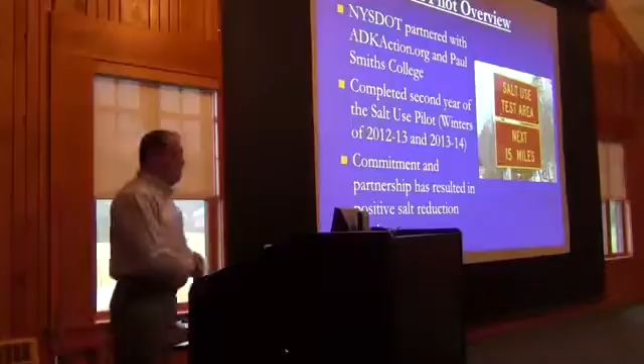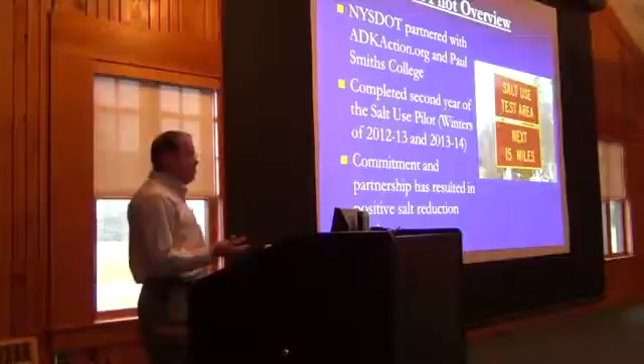The Department of Transportation partnered with ADKAction.org and Paul Smiths College to start this salt use pilot up here in the Adirondacks, to take a look at what our practices are and ways to help reduce the application of salt into the environment. We just completed our 2nd year. It was the winters of 2012-13 and 2013-14.

And this just kind of shows our commitment and partnership with the 2 groups, and to work with them and work with our folks to try to have positive salt reduction results. And this presentation here will show some of those accomplishments over the past couple of winters.

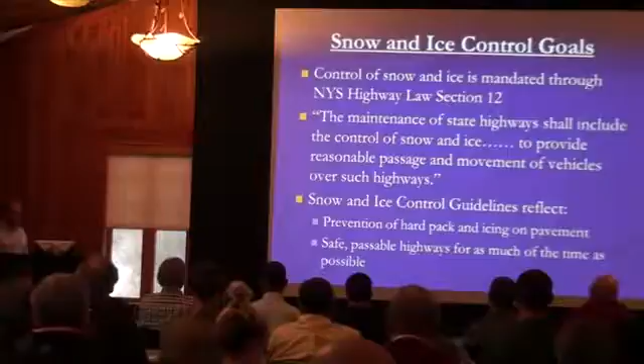Snow and ice control goals that the department has. We're mandated under New York State highway law to provide maintenance of the state highways, including snow and ice control. And it's our mandate to provide reasonable passage and movements of vehicles over the highway system. And our snow and ice guidelines do reflect that, and we do work to prevent the formation of hardpack and icing on pavement, while also maintaining safe and passable highways for as much of the time as we can.

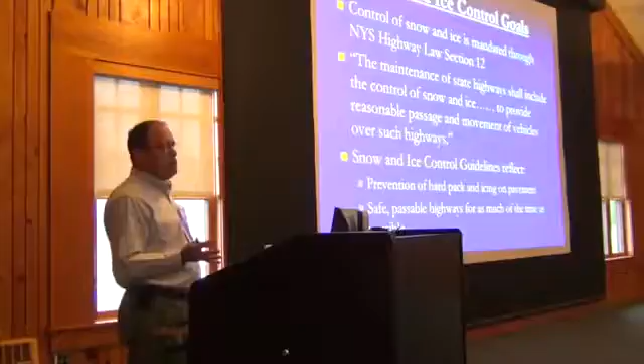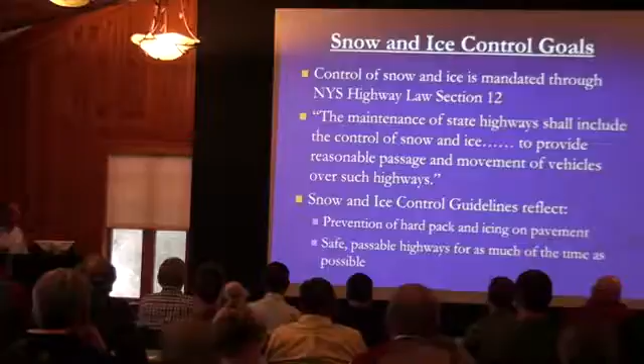There's going to be snow and ice accumulating on the highways, but as long as we're working to prevent that from bonding and to keep the highways relatively safe, we do that as best we can, while also keeping the environment in mind as we're conducting our operations.

In 2012, we modified our snow and ice guidelines in reducing our salt application rates. So statewide, for snow events, we reduced our initial application rates by 10% across the board. Okay, so that was one step we've taken. And we've also expanded the use of pre-storm anti-icing operations using liquids.

We're expanding the use of salt brine in advance of a storm so that we can get the brine and the salt on the road, and then once the storm hits, we can come by with a follow-up application rate of salt instead of starting with our higher initial application rate of salt. So that's another area where we've improved our operations.

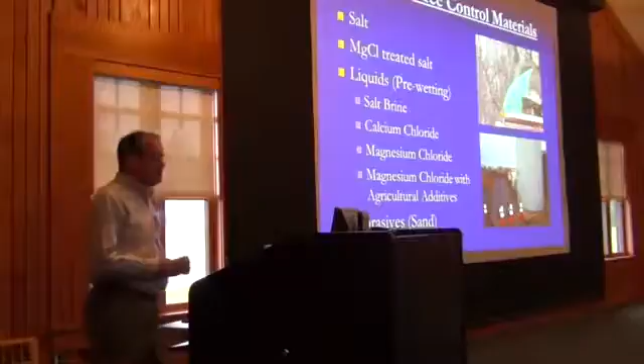Types of materials that we use: primarily we do use salt. It's relatively inexpensive, although the prices did skyrocket this coming year with the OGS contract. We also use salt treated with magnesium chloride. That allows the salt to perform a lot better in colder temperatures. We can use it at reduced application rates. And our DOT facility in Essex County has gone exclusively to treated salt now because of the added benefits that we've seen in its performance.

For liquids, which we use for pre-wetting the salt before it hits the road, is salt brine. Salt brine we also use for direct application on the pavements. But for pre-wetting salt, calcium chloride is used, magnesium chloride is used, and also magnesium chloride with agricultural additives is utilized. And again, that coats the salt, allows it to work quicker and work better at a lower application rate.

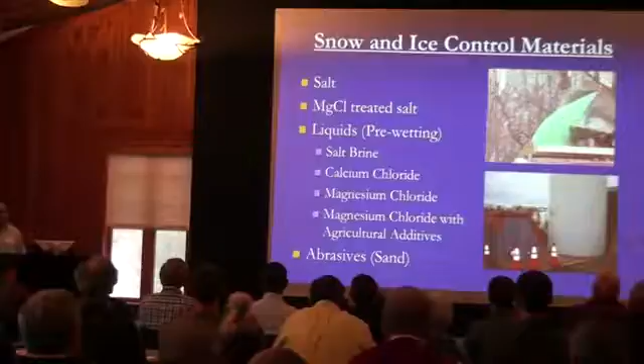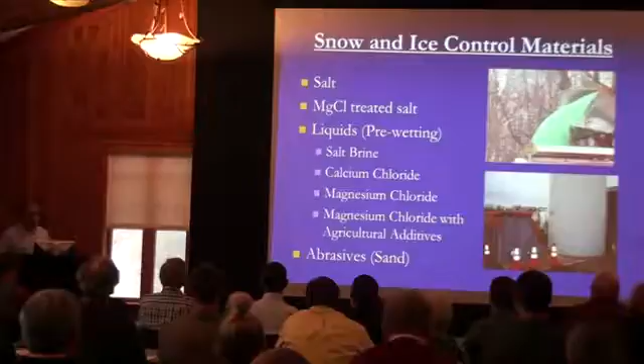Sand is not effective for higher traffic speeds. Heavier applications are needed, and the sand needs to be mixed with salt so that it doesn't freeze up rock hard in the storage facility. So in order for the sand to not freeze up, we have to mix salt in there. So we're still putting down higher application rates of sand with also a higher amount of salt within that sand.

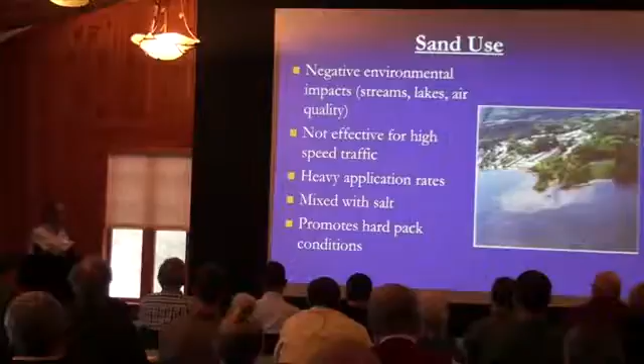Unfortunately, sand does not melt ice, so it does promote hard pack conditions on the road, which require higher amounts of salt to burn that off.

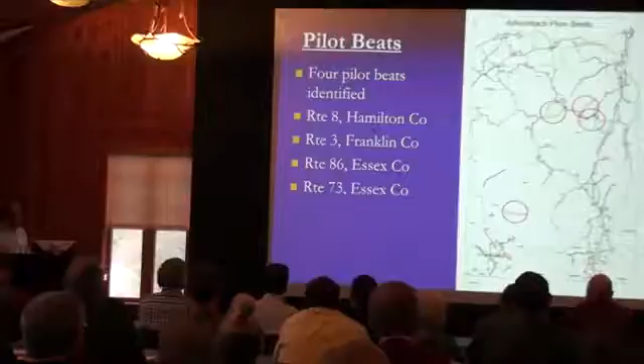The pilot beats: this map shows all the plow beats up in the Adirondack Park. All those different colors are individual snow plow beats. We identified 4 pilot beats for this study. One is down Route 8 in Hamilton County, Route 3 in Franklin County, Route 86 coming out of Lake Placid, and Route 73 along the Cascade Lakes corridor.

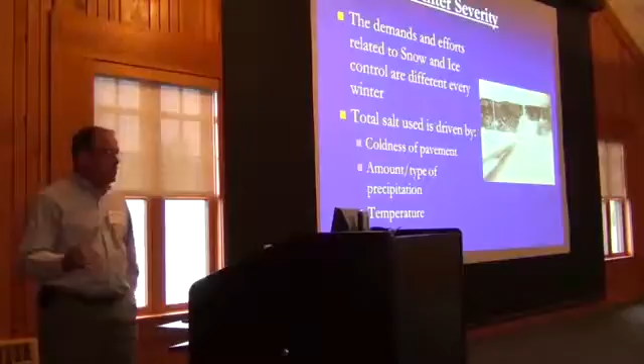All right, so I mentioned earlier some of the challenges that we face in trying to maintain safe highways in the winter and also being good for the environment. But the demands and efforts of snow and ice control are different every winter. You may remember the winter of 2011. That was basically a half winter for us. There was hardly any snow, hardly any winter precipitation. Last winter we got clobbered. It was a very, very bad winter. We're out there quite often treating the highway pavements.

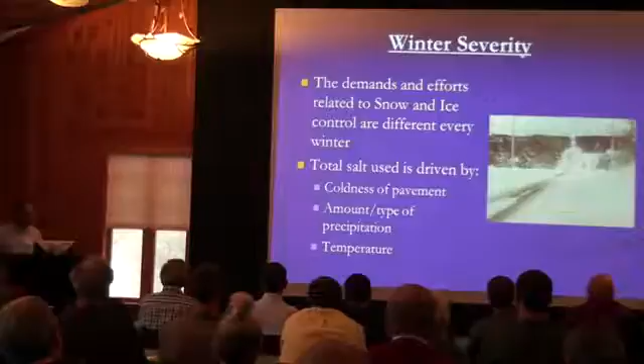So the total use of salt or any other snow and ice control materials is driven by the coldness of the pavement, the amount and type of precipitation, be it light fluffy snow, heavy wet snow, freezing rain, whatever the case may be, and the outdoor temperature.

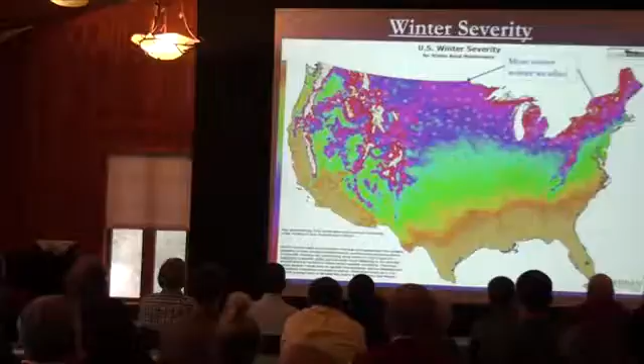This is a winter severity map of the United States, and this was put together through a research group that New York State is a part of called Clear Roads. Clear Roads is a pooled fund with 29 member states, and Dave Weeder here from Colorado DOT is the chairman of that committee right now. As I mentioned, New York State is a member of this.

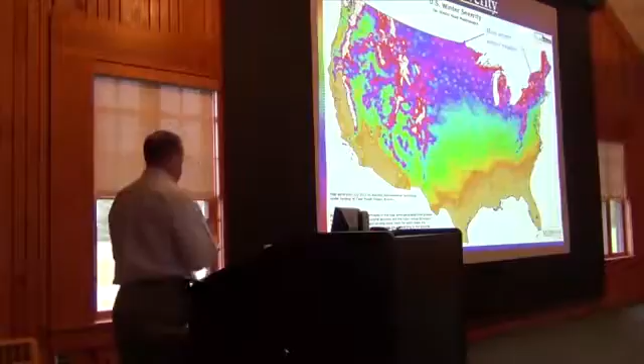What we did is we put together a research study to develop a winter severity map across the United States. Down south you really don't get much. You can see we have no member states down here, so we can't go to warm places for these meetings. But down at the bottom of the scale, where it's white and pink, those are the worst winter severity areas in the country. They take into account the amount of snow, freezing rain, temperature, blowing snow, all sorts of things. This is one map that compiles all that information.

So if you look at the most severe winter weather in the country, you can see out here in Colorado you got some white areas, up in the high peaks of the Rockies. Take a look right there. Right there is Saranac Lake. So Saranac Lake, Hamilton County, up here in the Adirondacks, the reds and the whites and the pinks. New York State has some of the worst weather in terms of winter severity in the country.

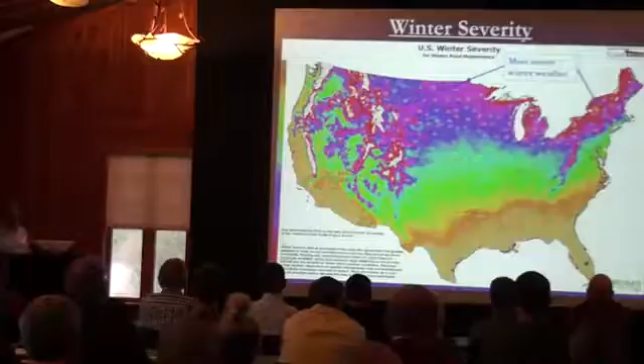Let's talk a little bit about the melting power of salt. Salt is not very effective in cold temperatures. At a temperature of roughly 30 degrees, 1 pound of salt will melt 45 pounds of ice. You drop 5 degrees down to 25 degrees, and 1 pound of salt will only melt 15 pounds of ice. And it gets worse as it gets colder.

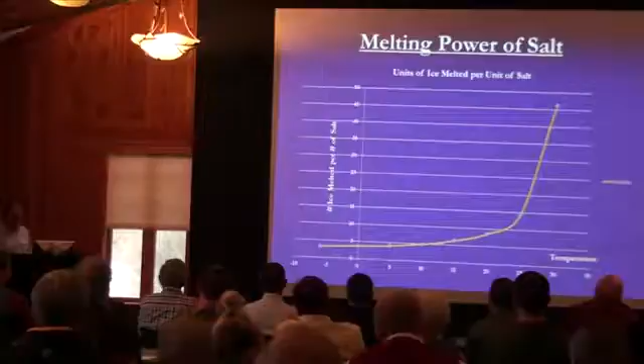So with the colder temperatures that we've been experiencing, although we're working hard to maintain lower application rates and control the salt use going out, with the lower temperatures and higher precipitation, more material is needed. So what we did is to kind of equalize a normal winter to what we experienced over the last several years.

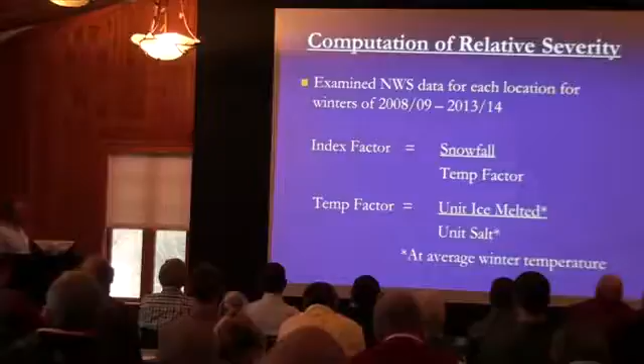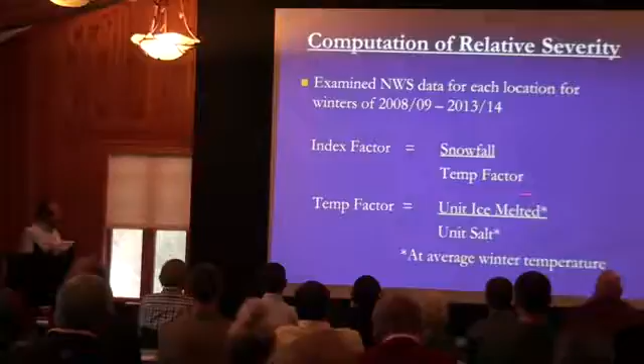We developed a relative severity equation here. So from 2008 through the 2013-14 season, we developed an index factor which looked at the National Weather Service snowfall data, and we divided that by a temperature factor. The temperature factor is the amount of ice melted over the amount of salt needed to melt that ice at average winter temperatures.

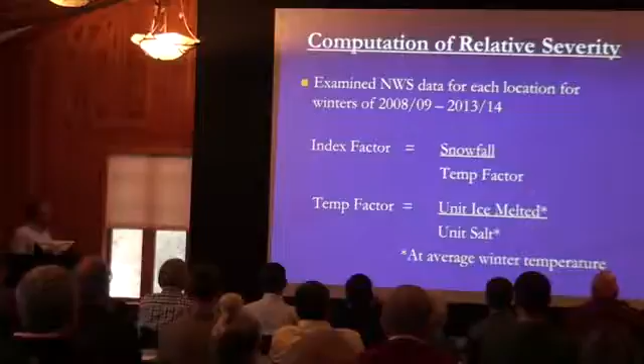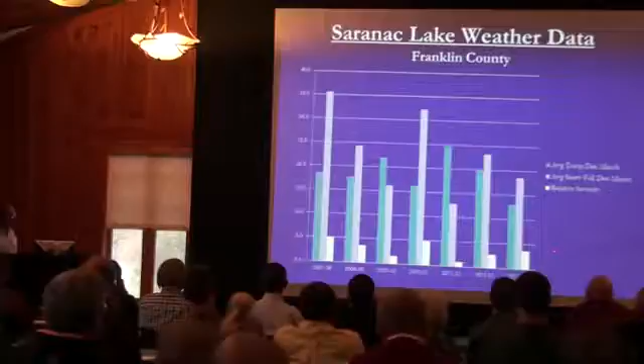But basically, using that equation with winter severity, you can see at least the last 3 seasons, when you equalize it out, the severity of the winters has been increasing. Okay? You can see that moving up. Now, my next batch of slides, I'm not going to go through all of them in the interest of time. I'm just going to go through one of them here, and I'll flip through the rest, but you can look at them on the

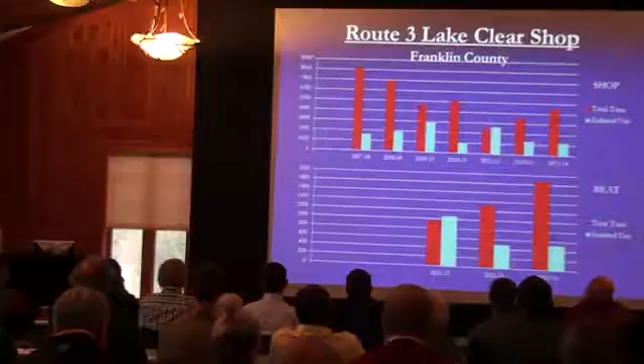So now if you look at the actual index use with the severity, that's the light blue, you can see that when you equalize it, it's actually been coming down. So the amount of salt we've been applying relative to the winter has been coming down over the last several years during the pilot. So we think that's good. It shows how closely our supervisors are monitoring the salt applications out on the highway system, and with the challenges of the colder winter, we're just trying the best we can to control the salt use, so we only put out as much as needed.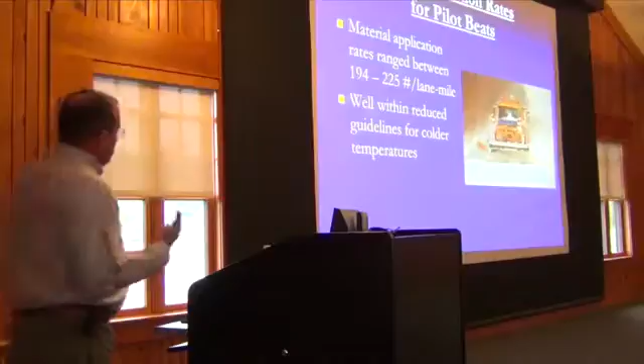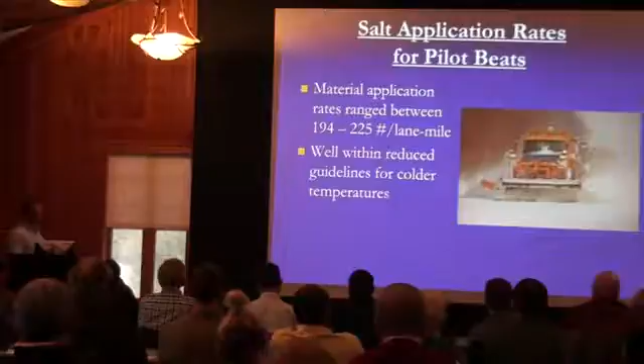So anyway, one of the successes here is the material application rates have ranged between 194 to 225 pounds per lane mile. For the temperatures we've been experiencing, that's well within and actually a little lower than the application rates in our snow and ice guidelines. For the lower temperatures, around the 20-degree area, our guidelines actually say 250 pounds per lane mile is what we should be using. But based on the data we've collected, we've come way down below that, and we're still maintaining the road safely.

Some of the tactics that we're using for the Adirondack pilot, and actually statewide in many cases, is the use of underbelly scrapers on our plow trucks. Our plow trucks usually have a front plow and a right wing. If you're out on the interstate, you might see two wings on the plow. But we also have these underbelly scrapers. It's kind of like a double-edged razor when you're shaving. The first plow takes off the majority of the material, and this underbelly plow will be like that second blade coming through to get anything that the first plow blade has missed.

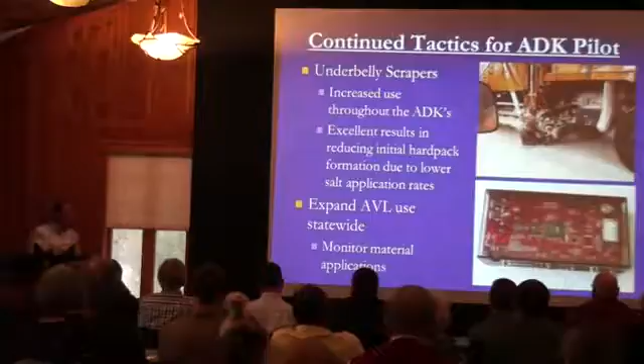In Franklin County, there are 20 plow trucks in that county, and we have 5 of those trucks with an underbelly scraper. And as we replace trucks, get new trucks into the fleet, we're getting more and more with the underbelly scrapers on there.

The underbelly scrapers, we have a lot of good experience with them, and when we lower those application rates as low as we can go, we're probably right down at the limit as to where the salt remains effective to when it becomes very ineffective. And we've been noticing with the lower application rates that hard pack had been starting to form in some areas, and those underbelly scrapers take it right up.

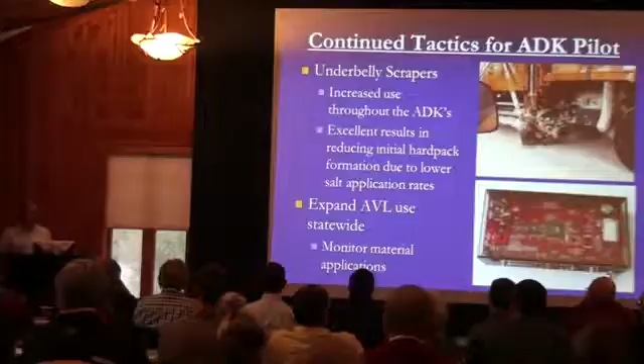So instead of coming down and putting a bunch more salt on there to try to melt it away or burn it off, those underbelly scrapers are actually doing a good job hitting that hard pack right as it's starting to form to keep it off the road.

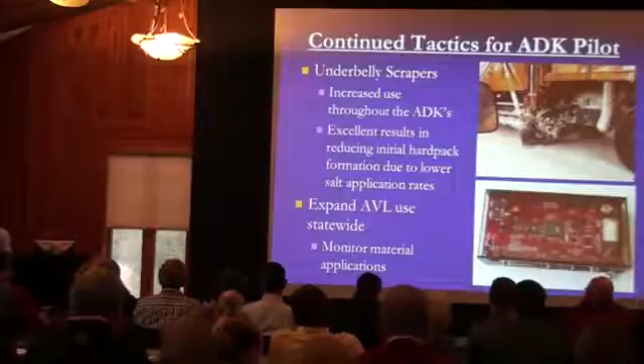We're going to expand the use of AVL, which is automatic vehicle location systems, across the state. We've been using them up here in the Adirondacks. The cell coverage, which is what we need to transmit the data, is kind of spotty, so we're not getting the full benefit of the AVL use up here. But statewide, we're expanding the use of AVL.

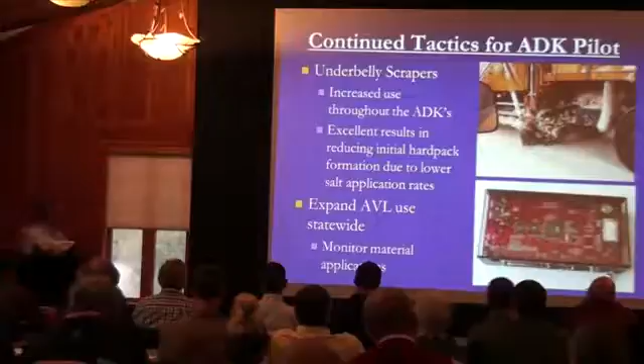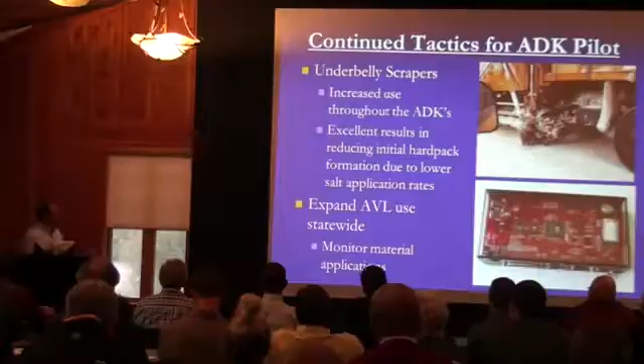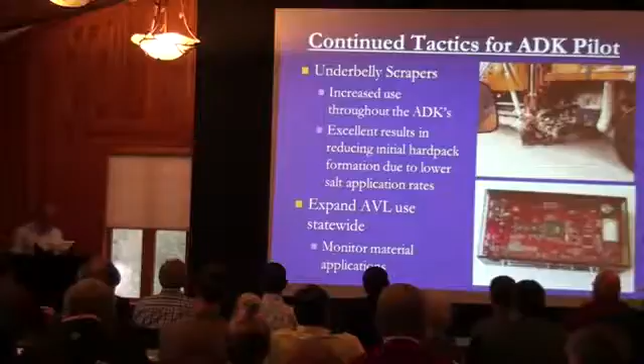And what that can do is provide data as to how much material we're putting out, where the trucks are, how fast they're going, that kind of information that the managers can use to make sure that if someone's putting out a much higher application rate than they're told to or should have, they can follow up with that driver, or maybe there was a situation that needed a higher application rate. So that's just another step to try to monitor our salt use as much as possible.

We're increasing the operation of pre-storm anti-icing. That's where we put the liquids down on the pavement before the storm actually hits. We can't do that for every storm. If it's going to rain ahead of time, that's kind of a waste of putting material out. If it's too cold, you might not be able to put the liquids down.

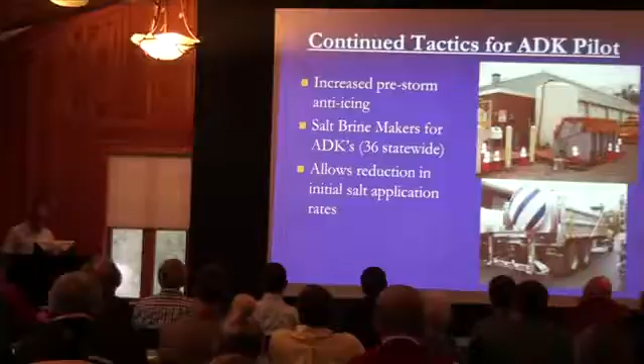One of the projects we worked on recently is purchasing a bunch of brine makers to be used across the state. We purchased, or are purchasing now and having installed, 36 brine makers across the state in addition to the few that we already had. And again, as I mentioned earlier, that allows the reduction in initial application rate of salt when the plow trucks actually come out to attack the storm.

In the Adirondacks, specifically in our Region 1, we have a brine maker going into the Severance shop and one at Ray Brook. And in Region 7, we have one in Plattsburgh, Malone, and Massena. We can't put salt brine makers everywhere because you need a real good water source, and some of our locations are on wells that just don't have the recovery. So we try to use locations that have a municipal water system.

So if we have brine makers in these locations, we can also always install a couple of storage tanks in our remote locations, produce the brine at one of these locations and tank it over and have it available at a location that doesn't have a brine maker.

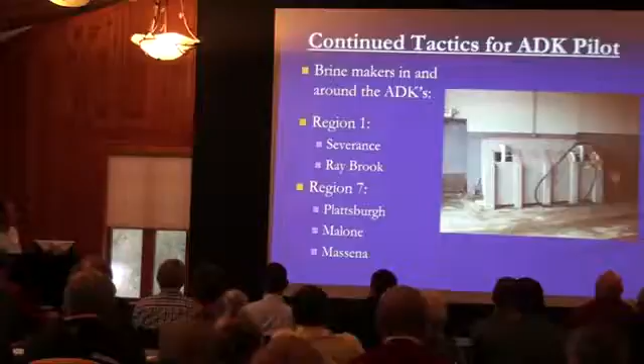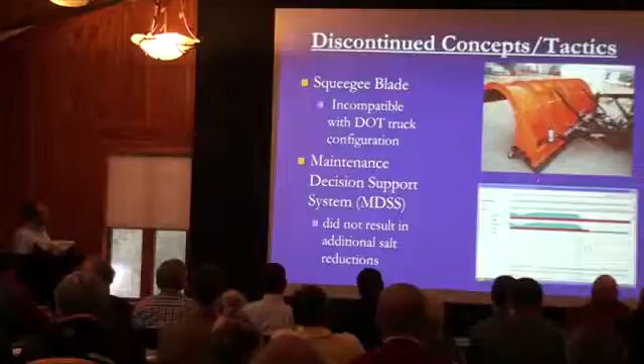Some of the things we tried but are discontinuing as a result of this pilot is the squeegee blade. Squeegee blade is a good idea, kind of like what I described with the underbelly blade. You got the extra blade here. You got the cutting edge right here on the front of the plow. This is a heavy rubber blade that comes down and squeegees off behind that first blade.

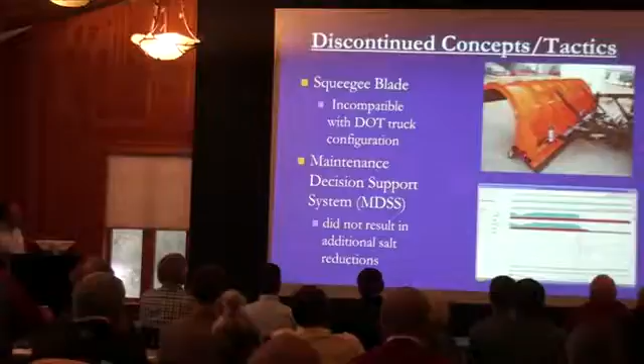Problem we saw with that is it's not compatible with our trucks. When the blade goes back and forth, it hits the framework of our truck and damages this part of the blade. It also didn't perform as well as we thought it would in terms of squeegeeing off behind, so we discontinued that use. That was one of the things we were going to try out here. We tested it out actually in the middle part of the state before we brought it up here, and found it didn't really work all that well.

Another system that we tried is a maintenance decision support system. We tried that at several locations across New York State. And basically what that does is it's supposed to take into account the weather forecasting, the type of material we're using, what our snow and ice guidelines are, information from road weather information system. All that data gets put into the system, and then it basically gives us recommendations.

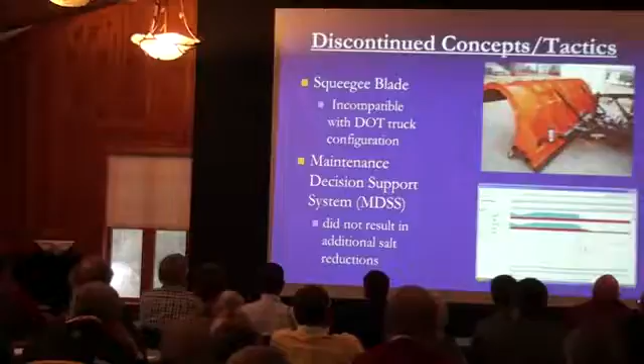It's kind of hard to see, but those three things there are little plow trucks. Okay, so as the storm was coming in, the system will tell us, okay, at a certain time, the plow truck should go out with a certain amount of application of salt or whatever it is, and then 2 hours later do the same thing or at a reduced rate or whatever. So it'll give you those recommendations on when to start, when to stop. Maybe you don't have to apply material, just plow. It's supposed to result in salt reduction.

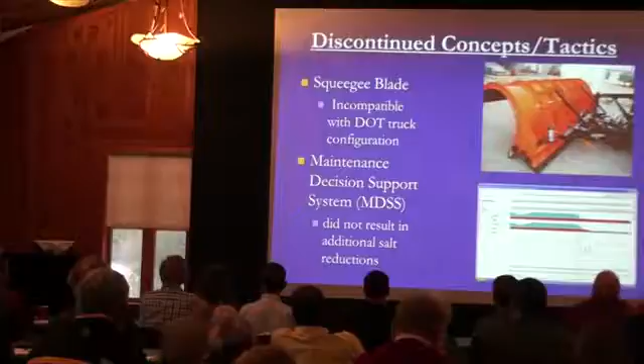And the pilot areas down in the western and the southern part of the state that we tried this, we really didn't see much of a salt savings that the system recommended because our application rates were already low enough that, if that told us to cut it even in half or even more, the salt wouldn't be effective. So that really didn't show us the savings because we're already managing our salt as well as we can. So there's no sense in investing any more into that system.

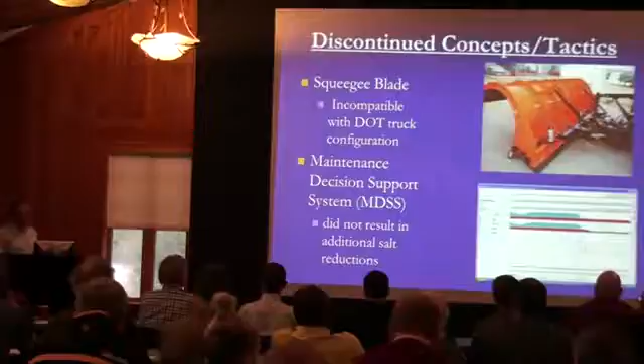And that's one of the key things is, point sources are a problem. We don't know how much that contributes, but if you have an open pile of salt just sitting out in the environment and over the summertime, that's just constantly getting rained on and washing into the environment. So if there's any uncovered salt piles out there in the towns or the counties or whatever, or at like a shopping mall or something, there might be a pile of salt plopped down there for their use. That kind of stuff needs to be covered, and that's where some improvements can be made beyond DOT, but we have everything under cover.

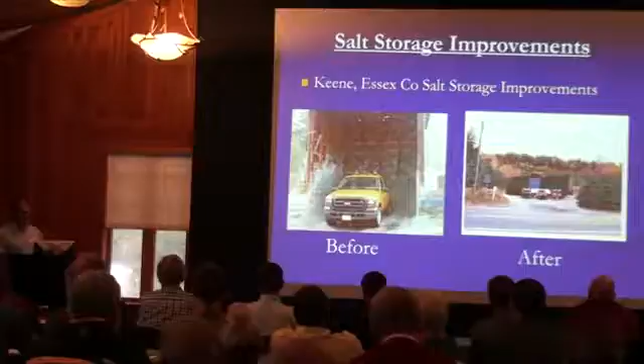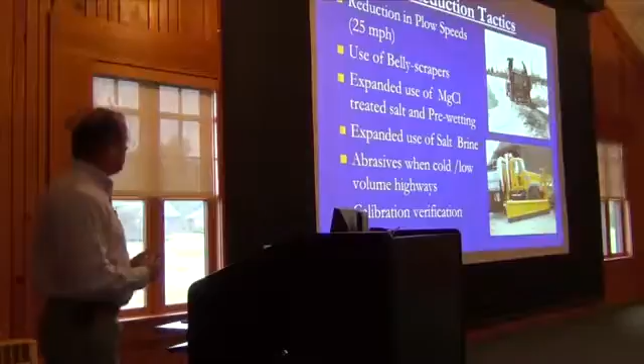So anyway, our salt reduction tactics, to kind of wrap it up here, one of the things we did up here in the Adirondacks specifically is to reduce the speeds of the plow trucks. Normally we go 30 to 35 miles an hour, but we reduce those speeds to 25 miles an hour. And the reason for that is as the salt comes out of the truck, it bounces and scatters. So if we slow down the truck, it reduces the bounce and scatter, and the majority of the salt stays on the road where it belongs, so it can be effective and anti-ice the pavement instead of bouncing off onto the shoulders and getting into the environment without being used.

Again, the use of the belly scrapers. Expand the use of magnesium chloride treated salt. As I mentioned, Essex County is exclusively using the mag chloride treated salt, and also for pre-wetting salt directly off our trucks. You can kind of see here, right here is what we call a saddle tank. It goes along the side of the truck, and in the saddle tank is where we would carry the magnesium chloride liquid. And then out of the back of the truck, when the salt comes out off the spinner, it gets sprayed at that point.

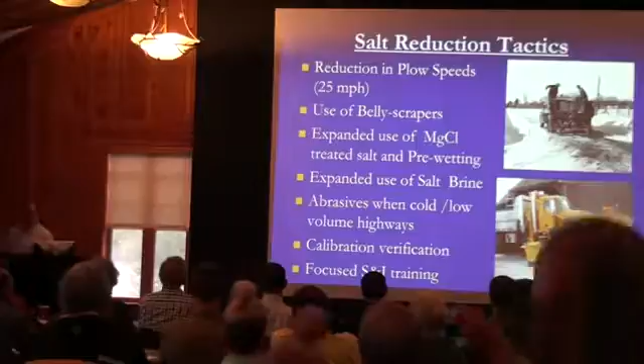We'll continue to use abrasives sparingly. Where the salt is ineffective, we may use sand on a steep hill or intersection to try to keep a little bit of friction there so the cars can stop. Calibration verification every year. Our spreader controllers for the trucks have to be calibrated. We make sure they're calibrated, so when the spreader is saying that we're putting out 115 pounds a lane mile, we're putting out 115 pounds per lane mile. And we'll calibrate them during the season to make sure the trucks are still accurate.

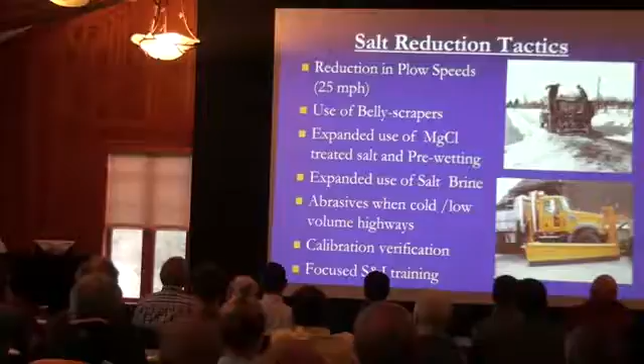And we're doing some focused snow and ice training. We do that statewide anyway, but up here in the Adirondacks, we're working a lot more with the supervisors and the operators to stress the importance of the environmental sensitivity up here, and making sure that they're putting out just the right amount of snow and ice materials that are needed.

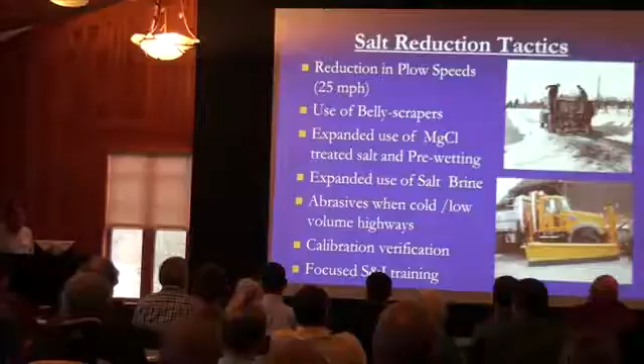Quality assurance by our supervisors and managers. One of the things we put up on each of our pilot beats are these warning signs, because we didn't know if by cutting down the salt, if that was going to really cause problems with the safety on the road. So those are still posted, I believe.

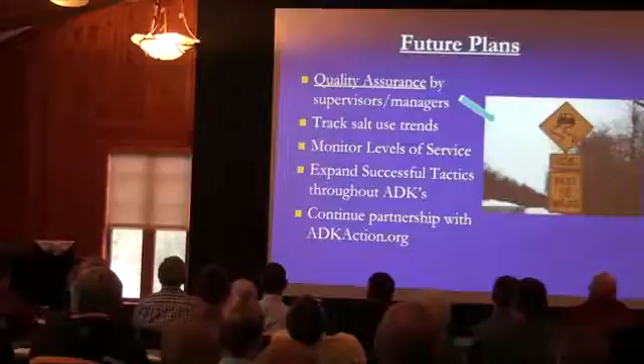But our supervisors and managers are going out and making sure that with the reduced amount of application we're putting out, that there aren't dangerous situations starting to pop up with hard pack and all that. So they're keeping good track of that. Continue to track the trends of our salt use, like I showed earlier with those charts. Again, monitor levels of service of the highway to make sure that vehicles can get through safely and reasonably.

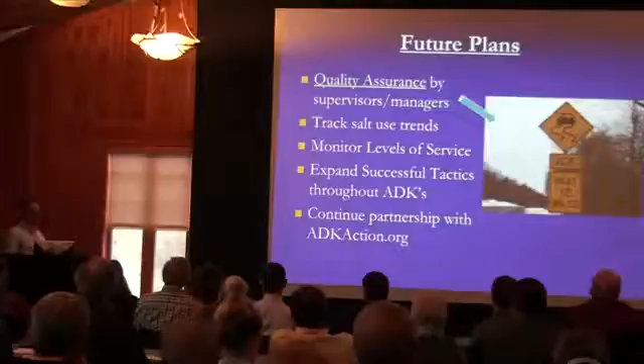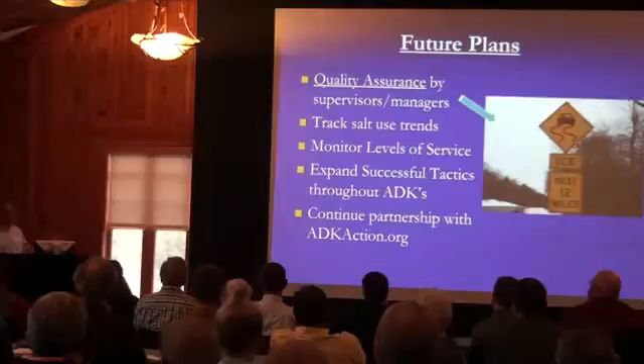The tactics that have been successful, we're going to continue to expand them, not just on the pilot beats, but throughout the Adirondacks and as much as we can across the state. And of course, we'll continue working with ADKAction.org. Try to keep the lines of communication open and work with them on our tactics and other efforts that we're making to be good with the environment when it comes to salt use.

New York State DOT is involved with a number of national level partnerships. The main one that we're with, as I mentioned, is Clear Roads. It's a research pooled fund for winter highway maintenance. We're also a member of the AASHTO Winter Maintenance Technical Service Program and the New York New England Maintenance Consortium. AASHTO: American Association of State Highway and Transportation Officials. I did that right. Okay.

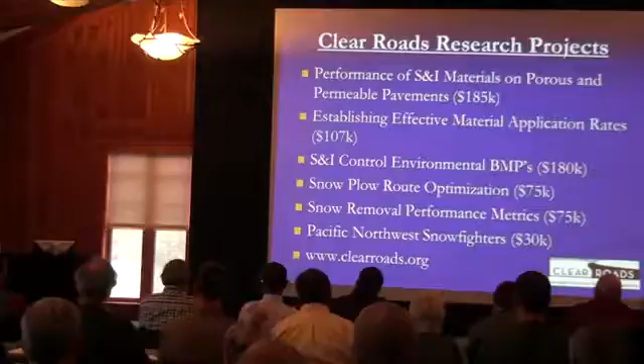New York State uses some of these, but we have even stricter chemical constituent requirements than the Pacific Northwest Snowfighters do in some cases. So some products that are approved by Northwest Snowfighters may not be approved here in New York because there might be some constituents that are a little too high. So the group is www.clearroads.org is the website if you want to take a look to see what other kind of work we're doing. But again, that's an outstanding group, and I mentioned Dave Weeder is the chairman of that now,

and we just have, what, is the remainder of this year, Dave? 27 Mondays, my friend. Okay, very good.